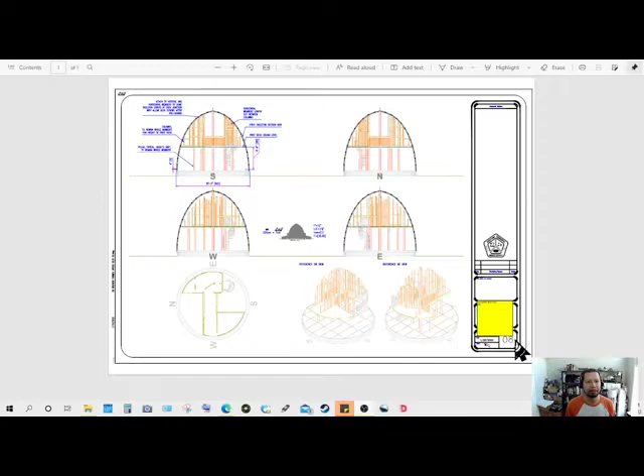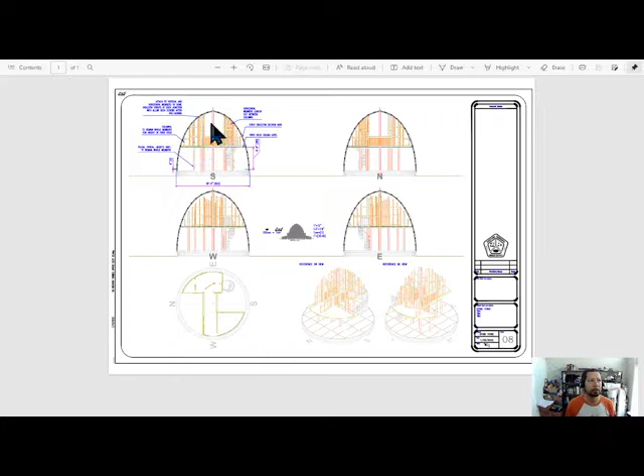This is a continuation of the interior framework. Another look at the framework, but in this case we're looking at the second level, or deck 2, the second deck framework. Again, we're only looking at framework, interior wooden frames.

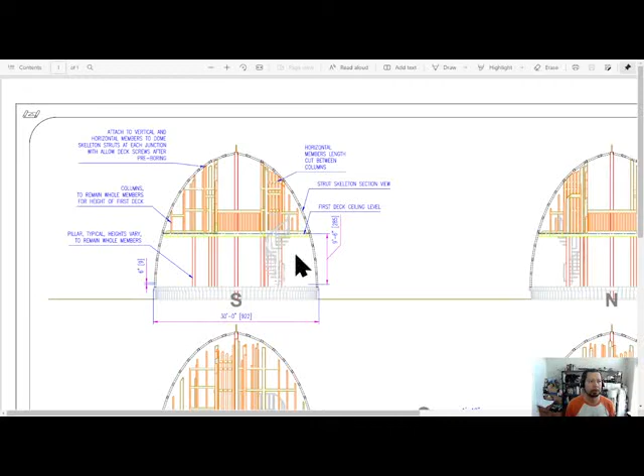Here we can see this view from the south, as viewed from the entrance side. I have added the spiral staircase since we're looking at the second deck. It's natural that we include that, not only for reference but also for building purposes. I will go ahead and dimension that or even detail that here in this sheet.

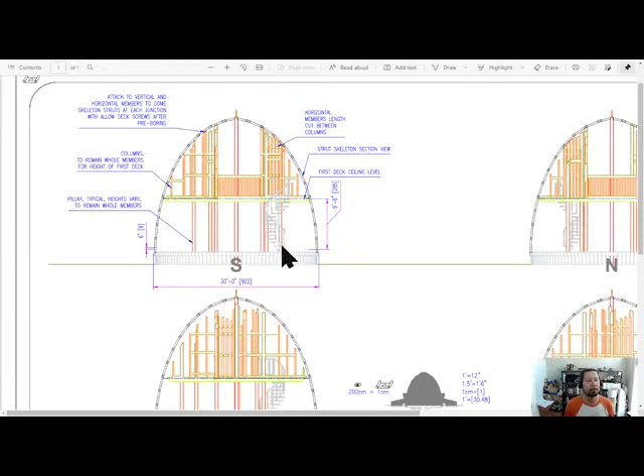I may have to do that here in this sheet. I believe it to be a good place for the detail of this structure, which is in itself a relatively complex thing to build and manufacture. So it requires some detail as far as dimensioning and a look at it from a few angles.

So I have the same type of comments here where these members, these columns, are attached to the framework, to the outer skeleton as I call them, the struts for the dome itself at each point where they meet.

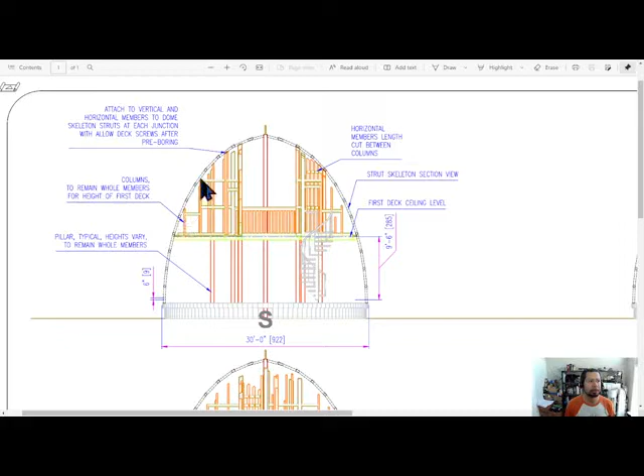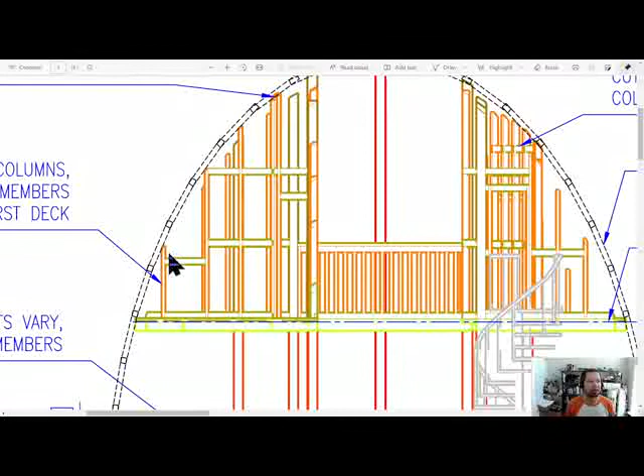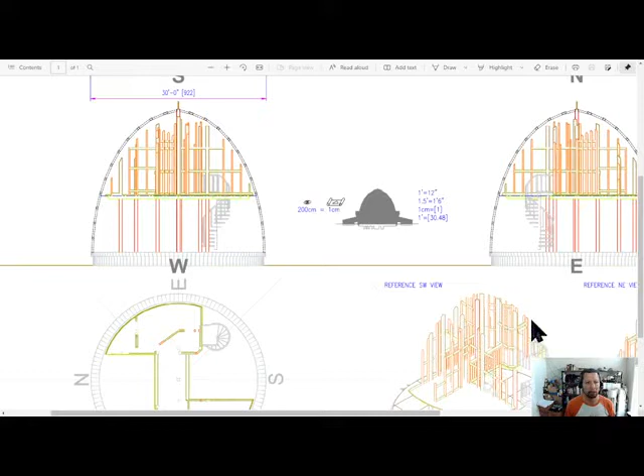These appear as if they meet, but they may not, because of course the dome outer skeleton does not touch every single part of each column as they come up, such as here. And just because of the right nature of the struts, how they're laid out, they probably don't meet at every top of each column.

But where they do, they need to be securely attached. So same comments here, that these columns are not to be cut at any point, beginning from the second deck to the top of each column, as shown here.

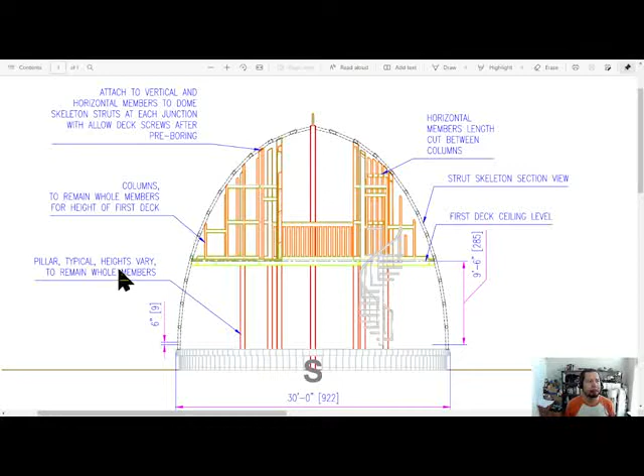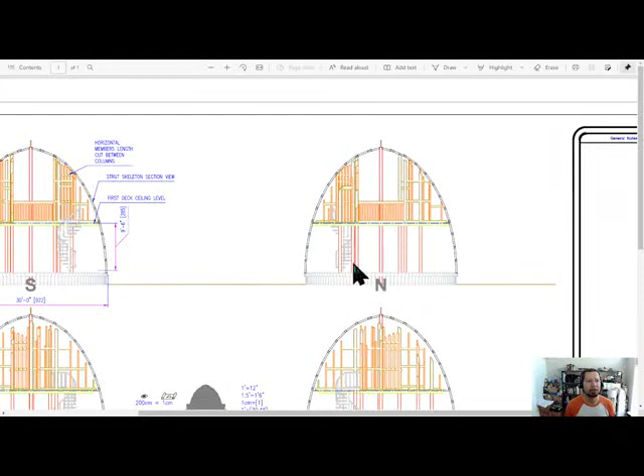This dimension here needs not be there. And it gives you some basic dimensions here. I have not dimensioned anything here, but it shows you that view. Again, these drawings are not completely finished. They shall be soon.

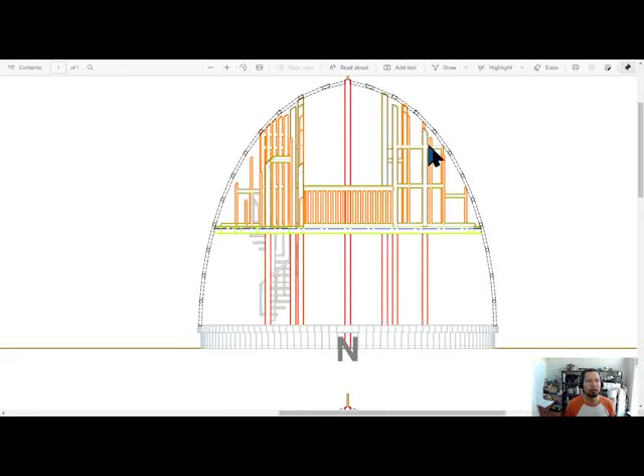And it gives you a look at the north side. This is the exit side. Of course, you can see the nice feature there for the bridge with the handrails, the framework on the second level.

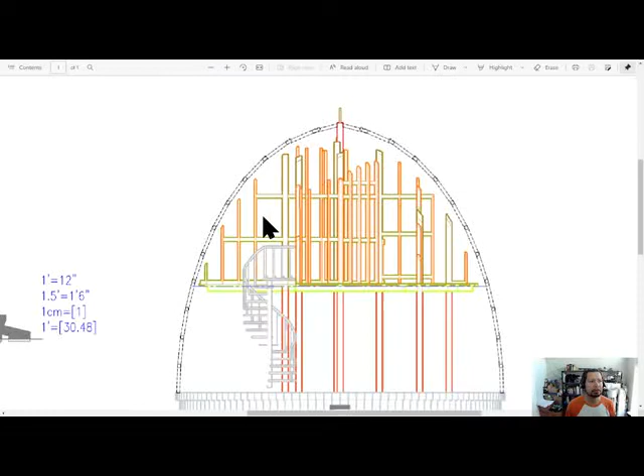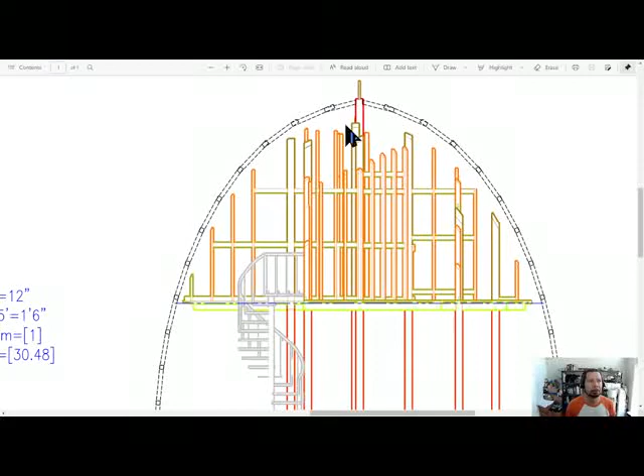Which I must say is a bit more complex than the first level, since it does require a lot more curved cuts, such as here. It follows that contour there pretty closely, and the reason why it doesn't go all the way up is because there is an inner lining that these may not poke through.

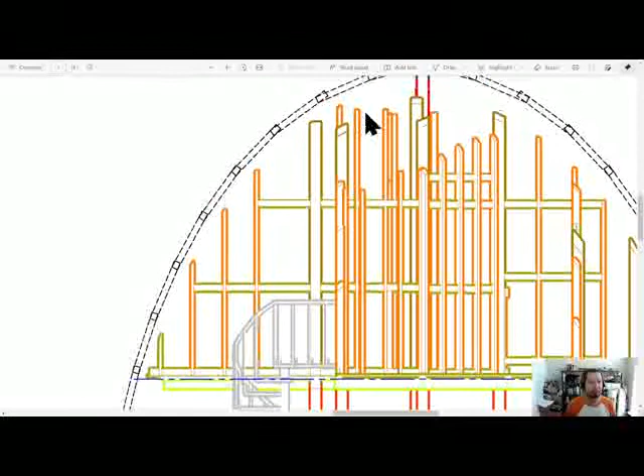That may change. These may be changed to where they go all the way up to meet these struts where they can, and they just may have to poke through the inner lining, which is the inner wall or inner material that separates and provides insulation between the outside and inside.

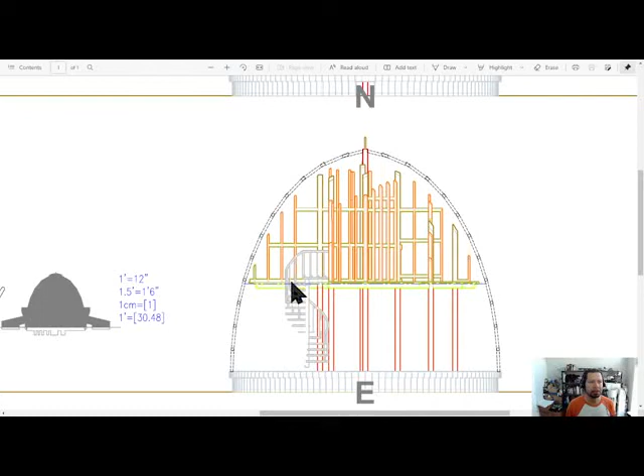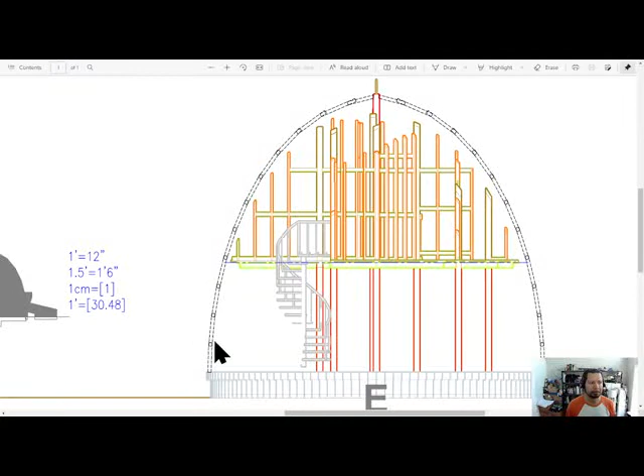And this is a good view at the staircase from the east side. This would be the south or the entrance side. So this gives you a clear view of it, its location. So that will have to be dimensioned quite a bit and detailed, perhaps on this same sheet.

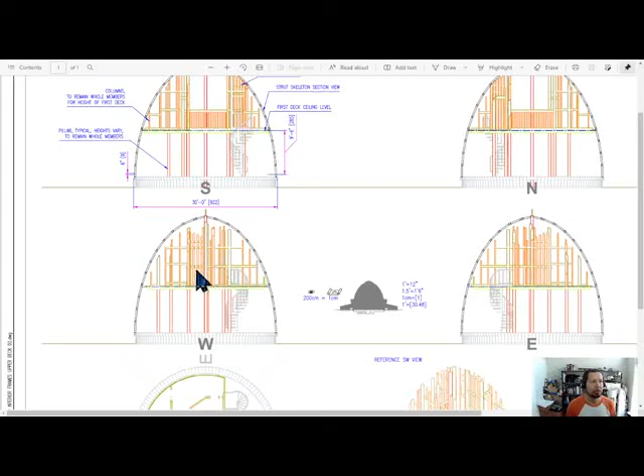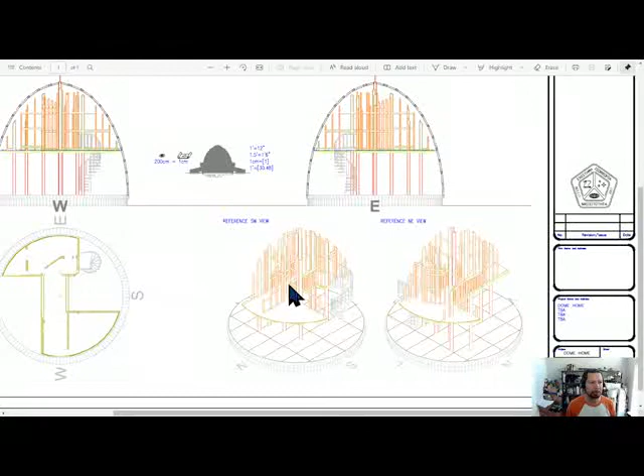Another view at that. The wall frames, the interior frames rather. And again, you reference what walls or what members are what by looking both at this view from the west and then looking at this view from the west and determining what you're looking at with this 3D or isometric reference view.

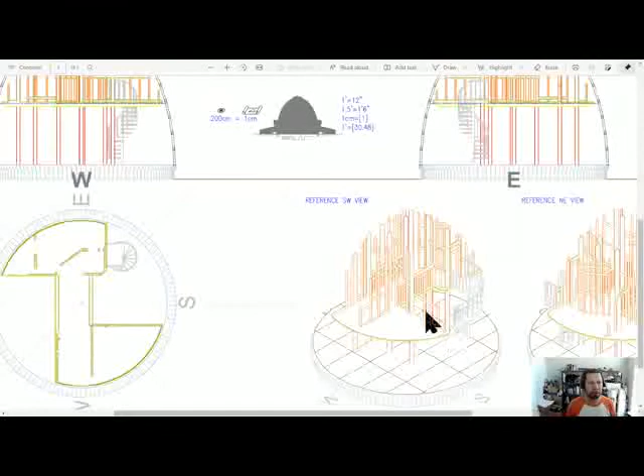For example, you're looking at these three members, these three columns here in orange from the west. That would be standing here. So that would tell you that you're looking actually at these three columns right here, 1, 2, 3, with the little stub green one right here. This little stub is right there. That's how you compare and orient yourself again.

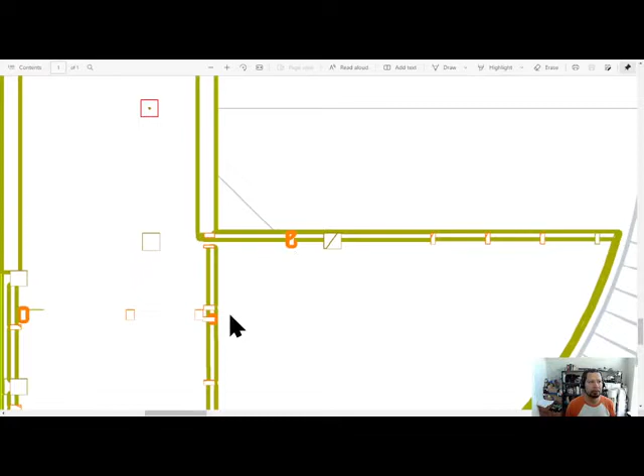And again, this is a view of the framework of the second level. Again, this is just showing individual pieces, individual members, 2x4s, 6x6 columns, pillars. This probably is a 2x4, etc.

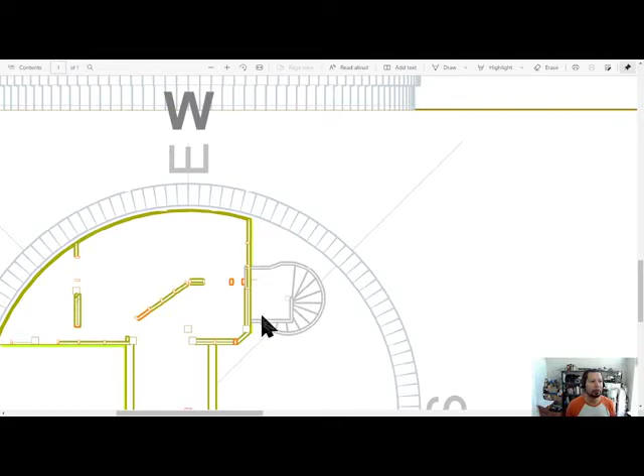These here being the handrails for the bridge, column. Of course, the staircase. That division there for that one room. There's the doorway, a little hall space. This is to have a wall right there.

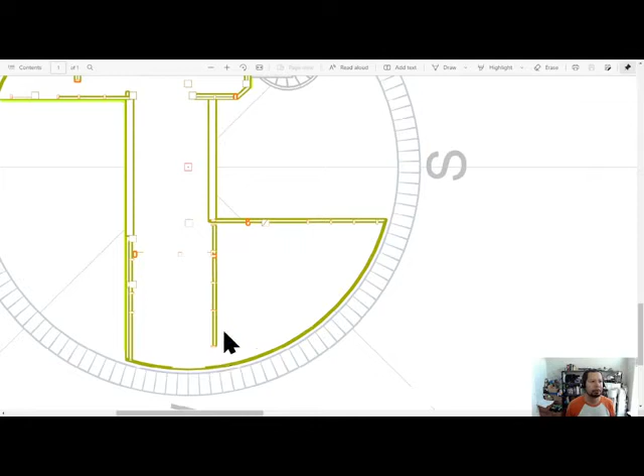Bridge area, and then this would be the bathroom area, and there's a small closet space here, I believe, and this would be a room accessible through here. This is a door frame, the bathroom door frame, I believe, is on this side. This is another door frame right here for access to the closet area, either this one or this one.

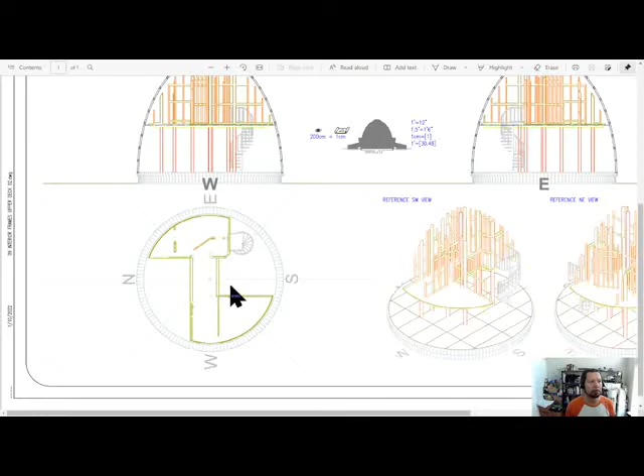And that is the second deck, second level. Again, this structure has 4 rooms, 2 on the top deck, and 2 on the bottom deck.

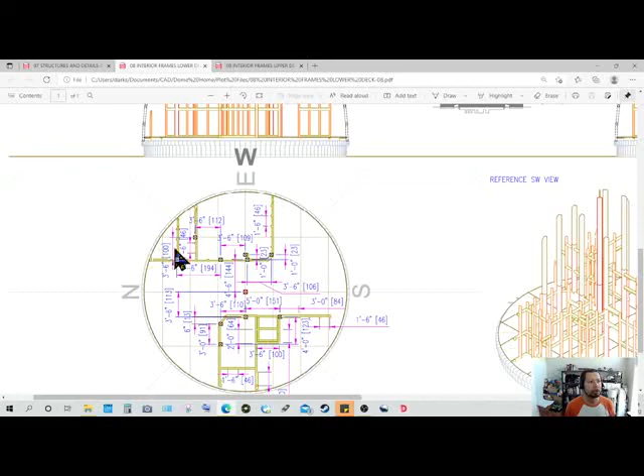Going back to the bottom deck, you can see that there is a room right here, room 1, room 2, and a bathroom, closet space. This is a storage area. Living room, open area, kitchen.